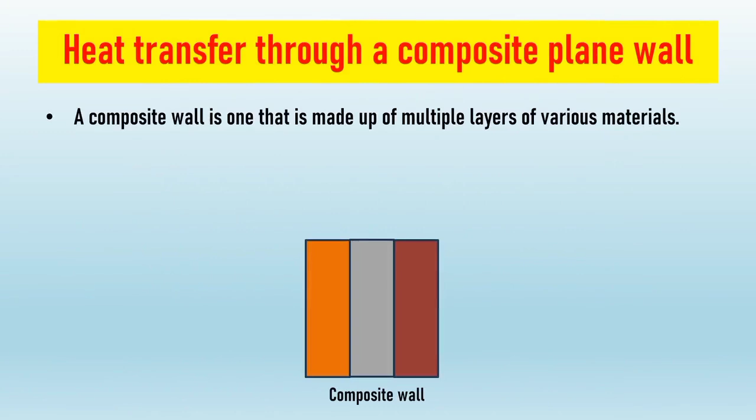So, let's start by learning about the process of heat conduction through a composite plane wall. A composite wall is one that is made up of multiple layers of various materials. Or we can say that when a wall is formed out of a series of layers of different materials, it is called a composite wall. Like the walls of furnaces, boilers, and other heat exchange devices, because the walls of these devices consist of multiple layers.

The layers of the wall of these devices may consist of a mechanical strength layer, such as fire brick, which provides high temperature resistance. Then the second layer may be made of low thermal conductivity material, such as insulating brick, which limits the transfer of heat. And lastly, the third layer fulfills structural requirements and ensures a pleasing look, such as regular brick.

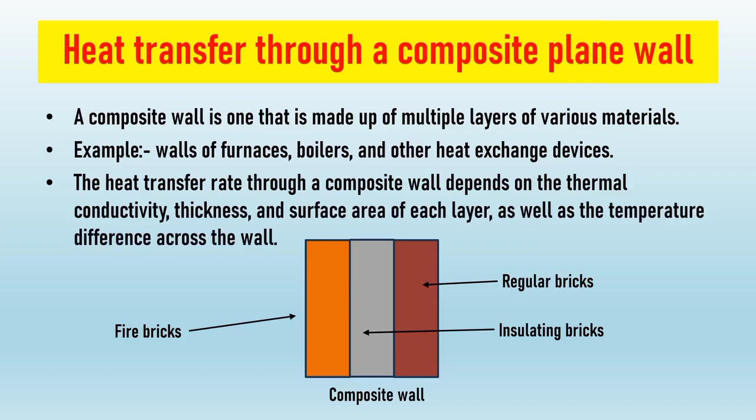So heat transfer through a composite plane wall is calculated using Fourier's law. Hence, according to this law, the heat transfer rate through a composite wall depends on the thermal conductivity, thickness, and surface area of each layer, as well as the temperature difference across the wall. Employing this concept as a basis, we will now construct the equation which can be used to calculate the amount of heat transferred through a composite plane wall.

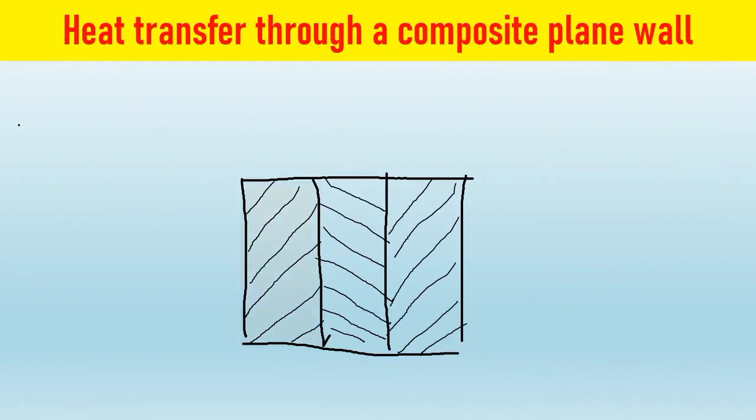Consider a flat wall that is made up of many layers of three distinct materials. Next, assume that the thermal conductivities of the materials used to construct the layers are denoted by K1, K2, and K3. Let the thicknesses of the layers be denoted as X1, X2, and X3 correspondingly. Furthermore, the resistance of each layer is denoted by R1, R2, and R3.

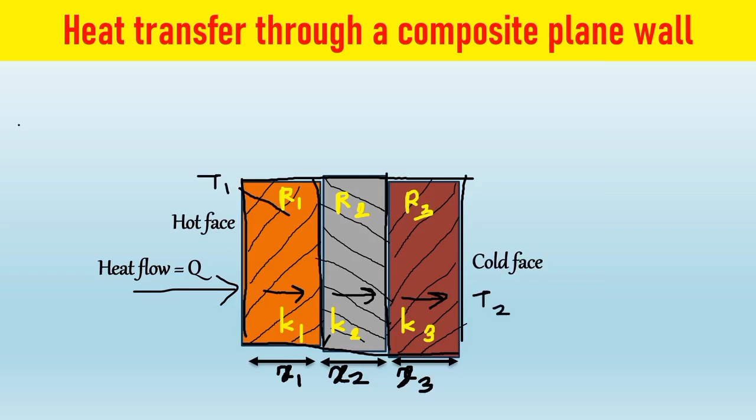Next, let T1 represent the temperature of the hot face, and T2 represent the temperature of the cold face. And let T dash and T double dash represent temperatures at the internal faces of the wall. As we know, temperature decreases along the path of heat transfer. Hence, let me assume the temperature drop across the entire composite wall and denote it by the symbol delta T.

Since the composite wall consists of three layers, there will be a decrease in temperature across each layer. Therefore, consider the temperature drop across the first layer as delta T1, across the second layer as delta T2, and across the third layer as delta T3. Also, let's assume that the layers are in excellent thermal contact. Let A represent the area of the composite wall, which is perpendicular to the direction of heat flow.

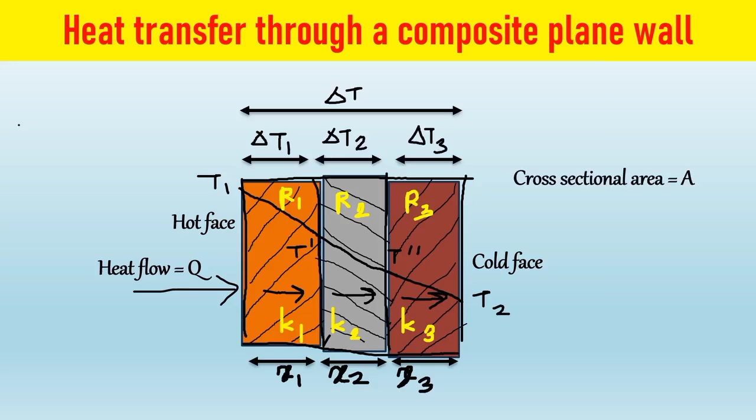So, in order to determine the rate of heat flow through the composite wall, let's apply Fourier's law to each individual layer of the wall. According to Fourier's law, the rate of heat flow through layer 1, that is, through the material of thermal conductivity K1, is given by Q1 = K1A/X1 × (T1 − T dash). From this equation, we can write T1 − T dash = Q1 / (K1A/X1).

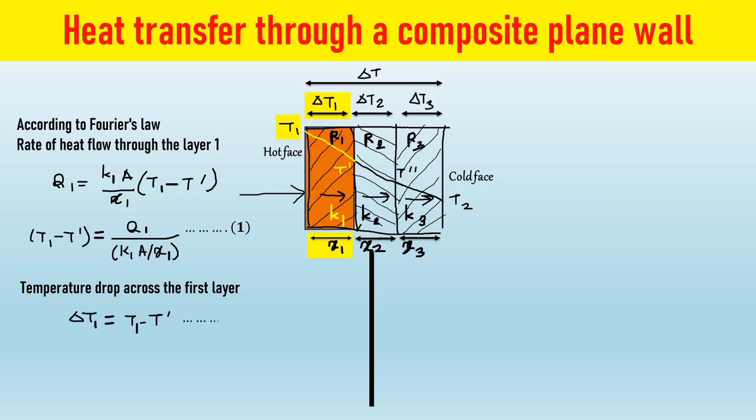Equation number 1. As we know, the temperature drop across the first layer, delta T1, is equal to T1 − T dash. Equation number 2. After comparing equation 1 and equation 2, equation 1 becomes delta T1 = Q1 / (K1A/X1).

Equation number 3. In a similar manner, let us compute the rate of heat flow through the second layer, which is made up of the material with the thermal conductivity K2. Hence, according to Fourier's law, rate of heat transfer through the layer 2 is Q2 is equal to K2A divided by X2 into T' minus T''. From this equation, we can write T' minus T'' as equation number 4.

Now temperature drop across the second layer is delta T2 is equal to T' minus T''. Equation number 5. After comparing equation 4 and equation 5, equation 4 becomes: so delta T2 is equal to...

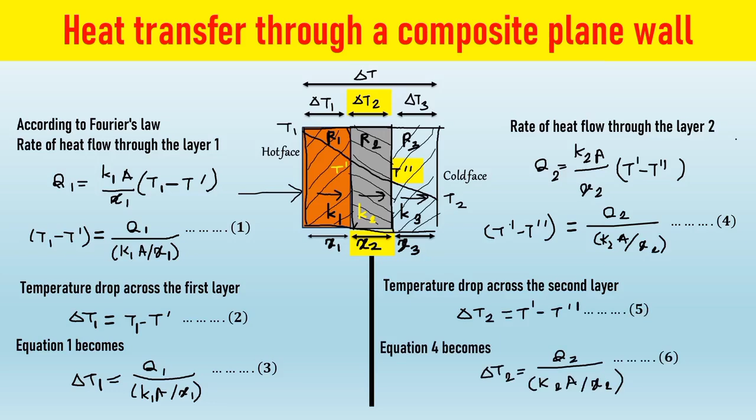Equation number 6. Similarly for the third layer, which is made up of material having thermal conductivity K3, rate of heat transfer is given by Q3 is equal to K3A by X3 into T'' minus T2. Equation number 7. Then temperature drop across the third layer: delta T3 is equal to T'' minus T2.

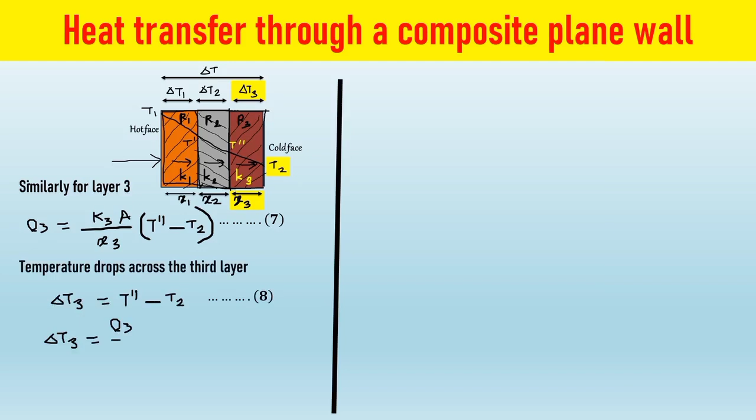Equation number 8. After comparing equation 7 and 8, we get delta T3 as equation number 9. Hence we get temperature drop across first, second and third layer. The temperature drop across the wall is equal to the temperature drop across the first layer plus the temperature drop across the second layer plus the temperature drop across the third layer. Hence we get delta T is equal to delta T1 plus delta T2 plus delta T3.

Equation number 10. Now let's put the value of delta T1, delta T2 and delta T3 from equations 3, 6 and 9 in the equation 10. So we get... Now under steady state conditions of heat flow, all the heat passing through the wall must pass through layer 1, layer 2 and layer 3. Therefore Q1, Q2 and Q3 must be equal and can be denoted by Q. Hence we get Q is equal to Q1 is equal to Q2 equal to Q3.

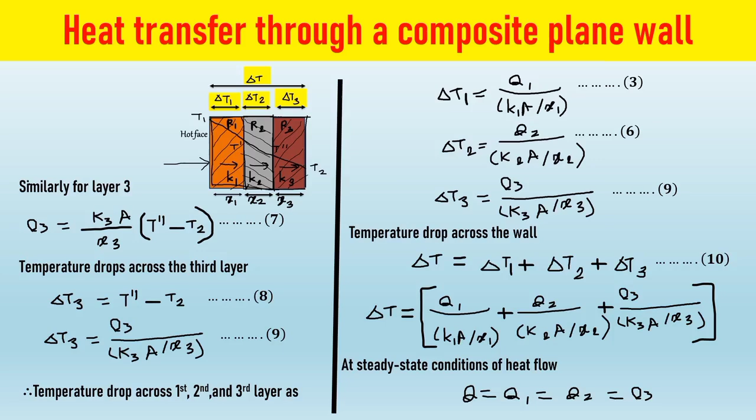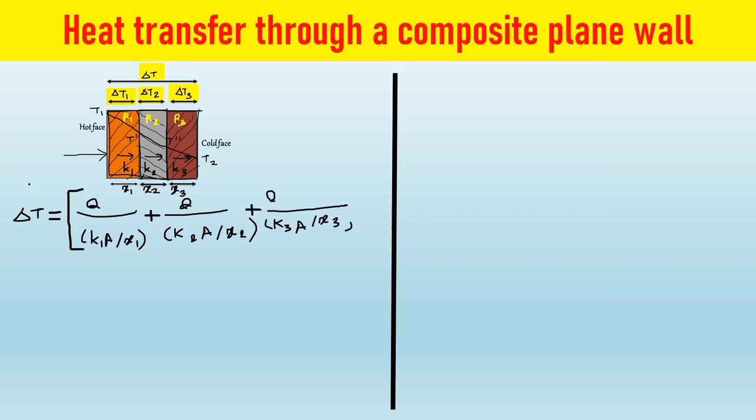Hence in the above equation, we can write Q in the place of Q1, Q2, Q3. As Q is repeating in all terms, let's take Q as common, so the equation becomes... Now after rearranging the terms, we get the rate of heat transfer through the composite wall: Q is equal to delta T divided by X1 by K1A plus X2 by K2A plus X3 by K3A.

But as we know, R1, R2 and R3 are the thermal resistances offered by layers 1, 2 and 3 respectively, and their values are R1 is equal to X1 by K1A, R2 is equal to X2 by K2A, R3 is equal to X3 by K3A. So after putting the values of R1, R2 and R3 in the above equation we get Q is equal to delta T divided by R1 plus R2 plus R3. This is another form of the equation for rate of heat transfer through a composite wall.

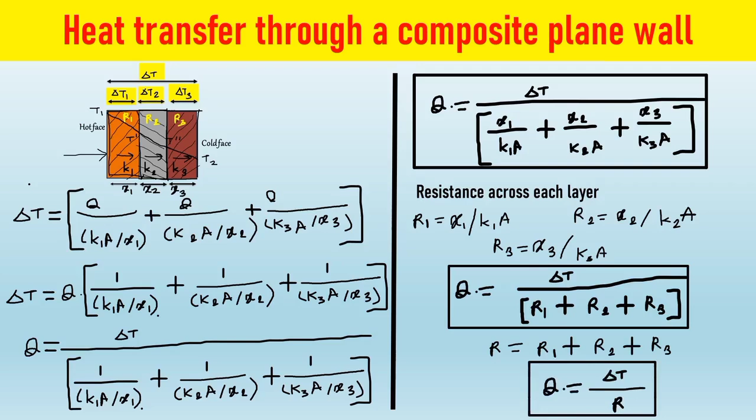Now if R is the overall resistance, we can write R is equal to R1 plus R2 plus R3. Hence the final equation for rate of heat transfer through a composite plane wall is Q is equal to delta T divided by R. So we get 3 equations to determine heat transfer through a composite wall. So that's all about heat transfer through composite plane wall.